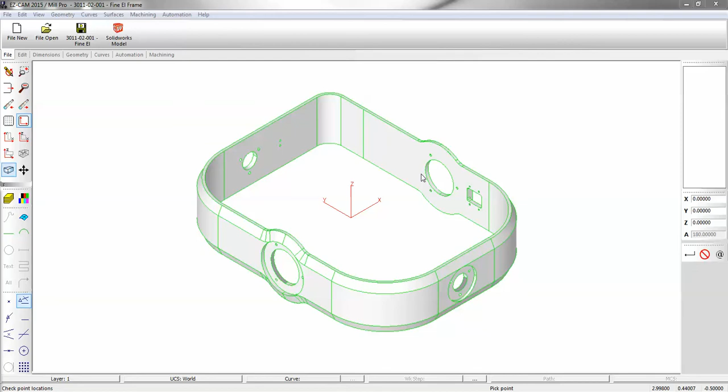First thing I'm going to do is position our origin. The origin is in the middle of the block. So I'm going to go to my stock setup, and you have a couple of automated choices here. We're going to use top middle.

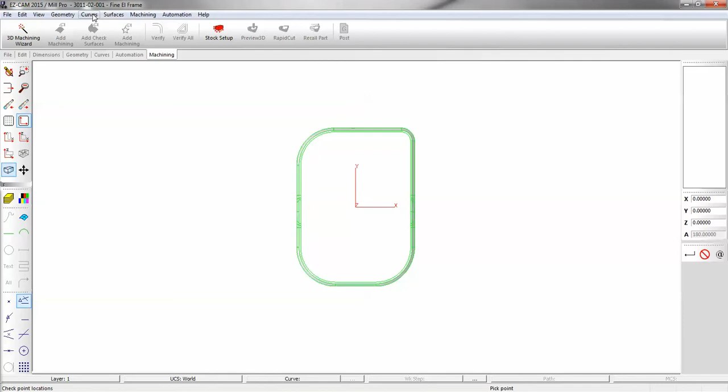Now I need to create a pocket and then an outside profile. So we need curves to tell the tool where the boundary is. So we're going to use silhouette boundary and select all surfaces. So you get the silhouette on the outside and the inside. I like to make my machining curve active, so when I go to make my work step, it knows to use the active curve.

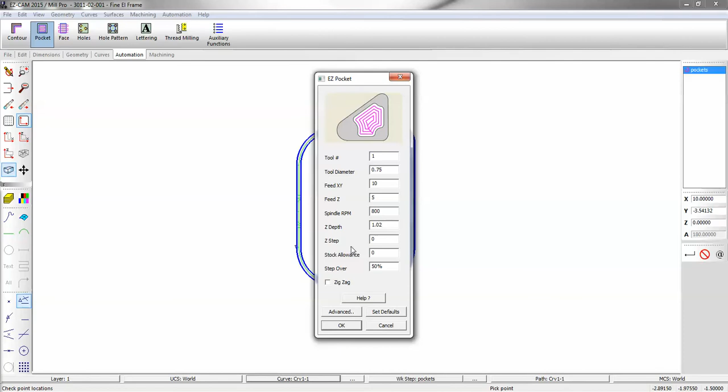Now the total depth is 2 inches, but we're going to cut both sides. We'll do the top side and the bottom side. Now because of the high-speed machining toolpath, I can go at a whole inch depth because the high-speed toolpath gives it a nice even chip load. I'm going to combine that with the helical plunge.

Now I'll make the outside curve my active curve. We'll create a contour work step. We'll go a full 2 inches, but we're going to step it down 1/4 of an inch each time, and we'll leave a finish allowance for another contour operation to follow.

Now you can see we're cutting on the inside of that curve. I still want to be climb milling, which is on the left. So rather than reverse the tool path like you see here, reverse direction, that would be conventional milling. We're going to reverse the curve itself. So we're climb milling. Because there's a heavy amount of material on these corners, I'm going to add a total stock.

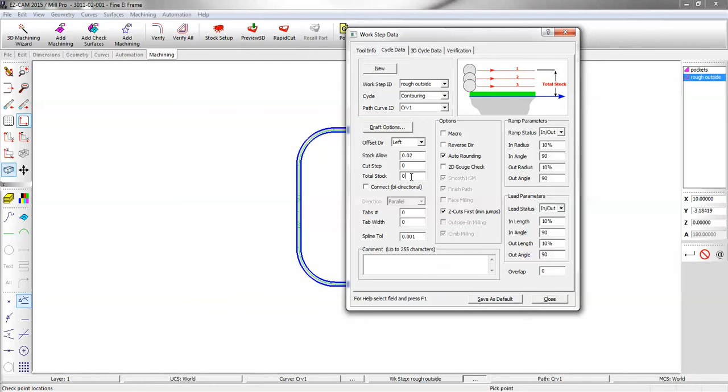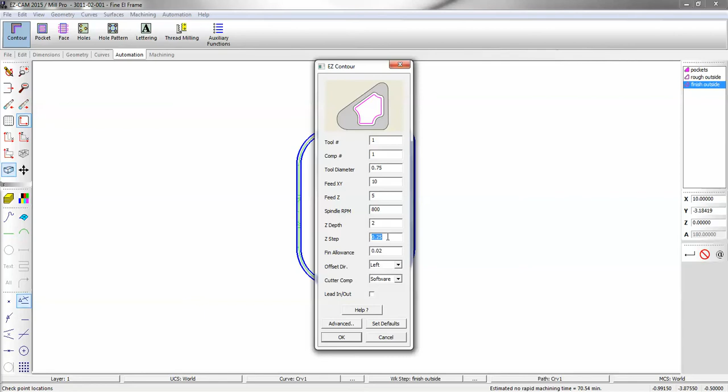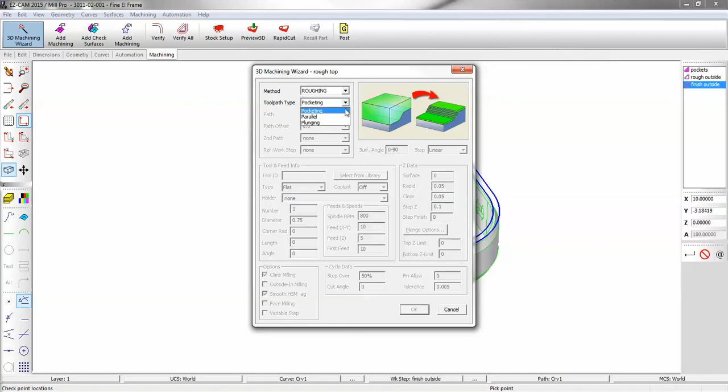Now we're going to make a finish pass. Next, we have to rough all the material down to the flat surface on the top. So we're going to use the machining wizard for that. We'll leave a finish allowance for a ball end mill.

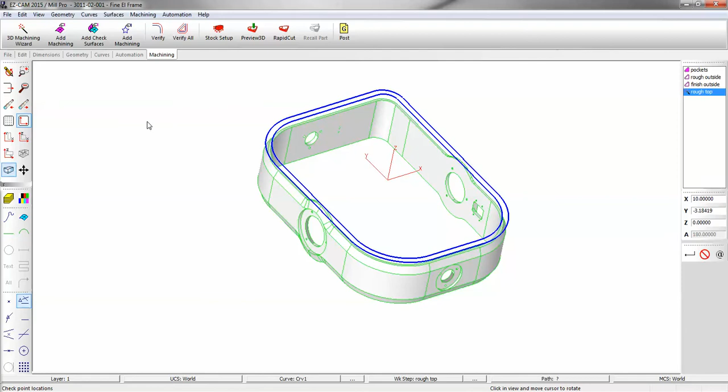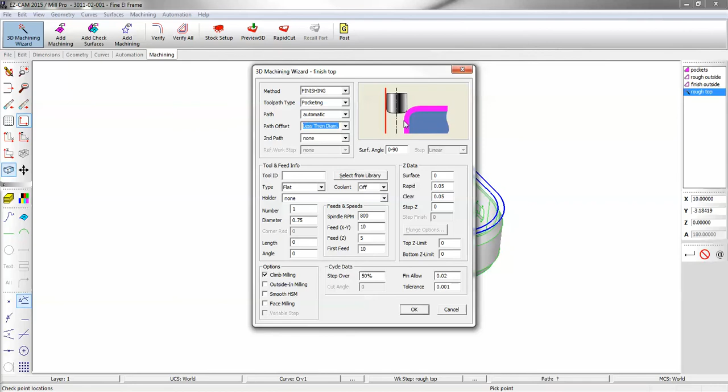Now we'll go in with a finish pass. The path offset, I want the ball end mill to drop down the wall less than the diameter. So it takes the ball end mill, puts it tangent to the bottom of any chamfer radius and such. Our step over, if you were to put in 1/10 and you were to tighten up the tolerance to 1/1000, you would get the best surface finish.

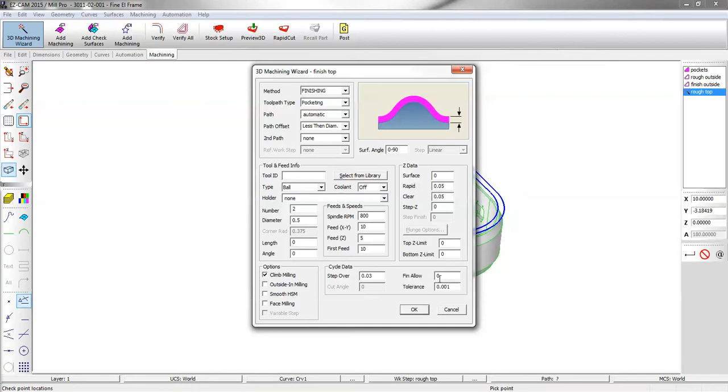Now if that was a semi-finish pass, just to remove the cusp left over by the roughing operation, I would just leave a finish allowance and then go in without a finish allowance.

Now to machine the other side. So we're going to use another coordinate system for that. And we'll place this right on top of the other one. And we'll move it around. We'll rotate around X 180 degrees, selecting only our coordinate system. And we have 2 inches to move.

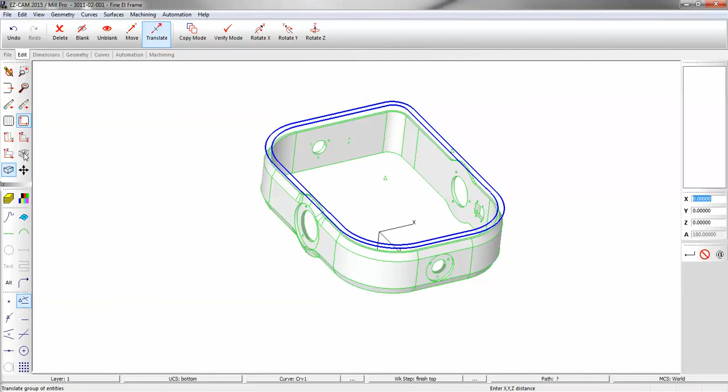Now I want to use the same machining strategies as I did on the top. So I'm going to open up our spreadsheet. I'm going to highlight all of our work steps, right mouse click and copy them. And we're going to click on the total field and it pastes just above it. So we're going to paste the work step. And the 2x is going to represent our bottom coordinate system.

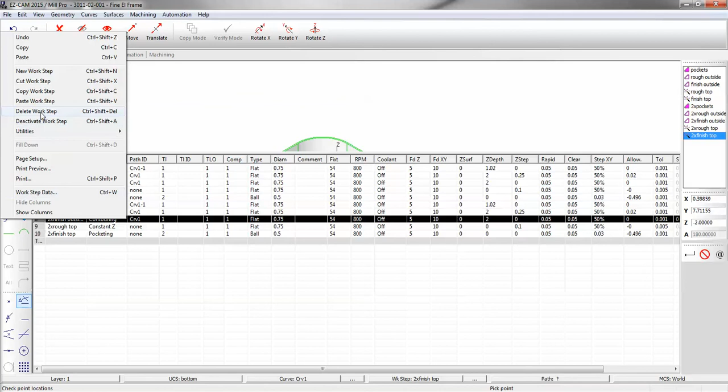Now we don't need to rough and finish the outside. We went to full depth for that. So I'm just going to right mouse click and delete the work step. Now for 2x pockets, we have to assign the bottom work step, bottom coordinate system, and do the same for the other operations.

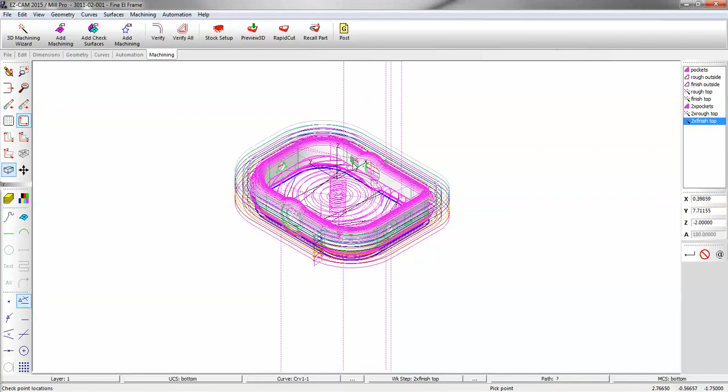Okay, both the top and bottom have been completed. So I've used coordinate systems for this side, that side, and over here. We're going to just place one right in this location here. And I'll call that side 1. Now we're going to go to the view menu and I'm going to line that coordinate system up on geometry. Choose only circles. And I'm going to pick that circle right there.

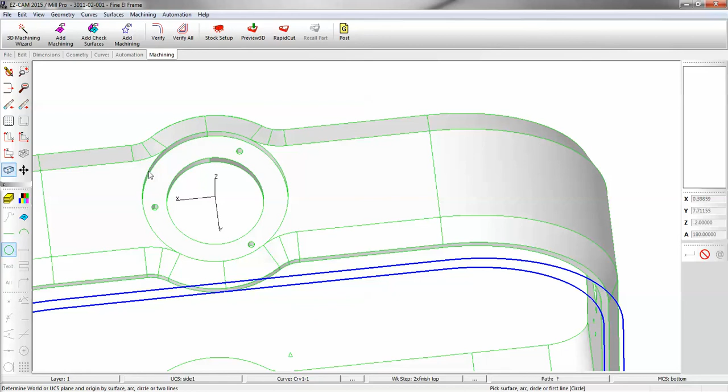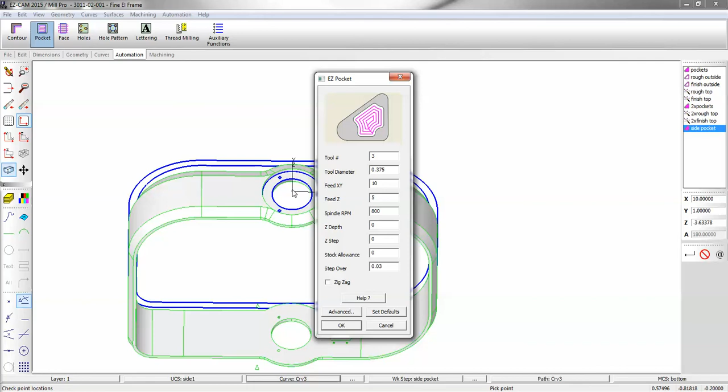Now I'm going to create a curve from a face boundary. And we're going to machine this pocket. Depth is 0. The curve in relationship to the coordinate system is at the depth of the pocket, so it knows that automatically. Go to advanced. We're going to change that to a flat end mill. And we're going to use the side coordinate system.

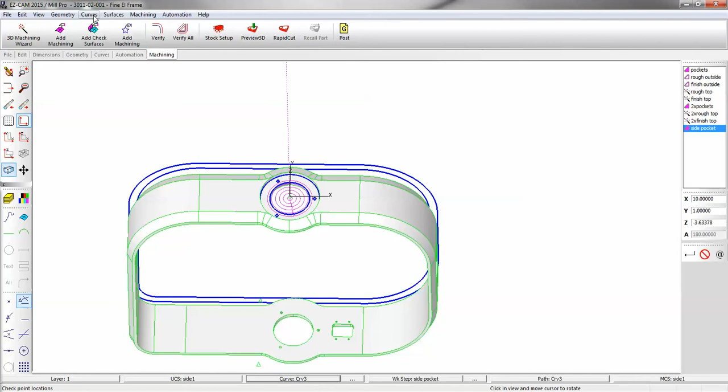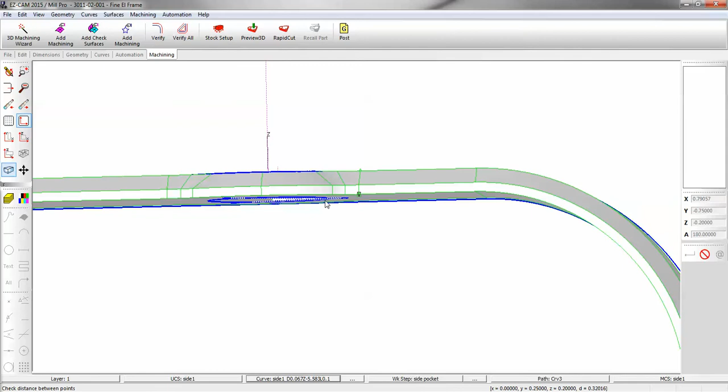Now for the holes, I'm going to use hole recognition. And I'm going to take a measurement of the thickness. So about 200 thousandths. Go right to advanced. Tool 4. Diameter is 0.067. Go 0.2.

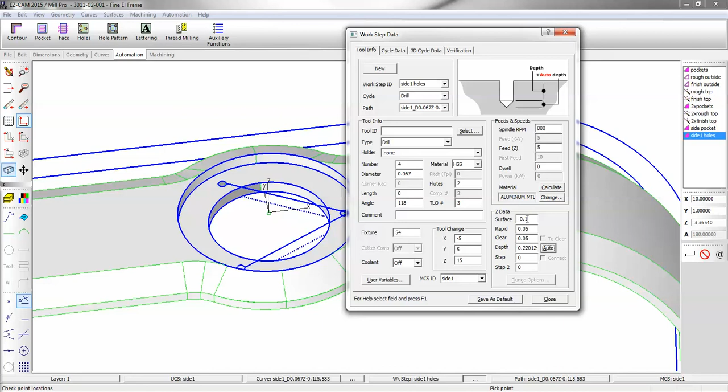It knows its starting depth by hitting auto. It knows that the pocket has been cut and it's starting below the surface. So our rapid, we want to be above that. Now let's put it all together and see what we get.

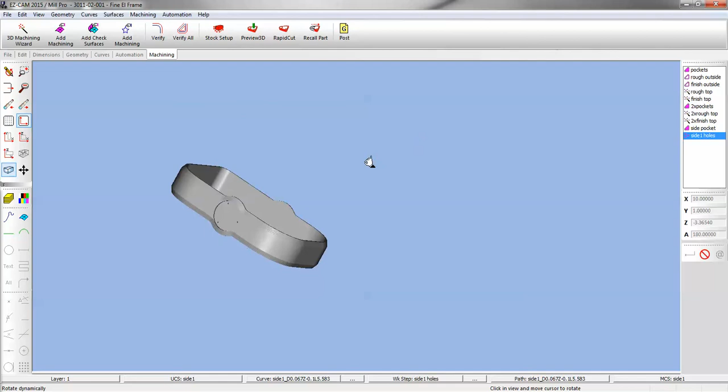Now for our G code, we'll turn off all the 2x operations by right mouse clicking and produce the G code. And we turn those off, turn these back on. We'll leave the side holes out and produce the G code, deactivate these, and a third program.